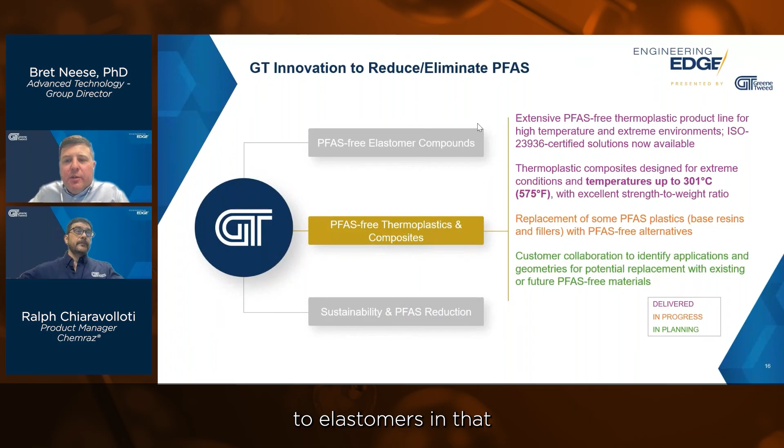Moving on now to PFAS-free thermoplastics and composites. It's a very similar story to elastomers in that we already have an extensive PFAS-free thermoplastic product line. The example that I want to share related to PFAS-free plastics and composites is an example related to wear compounds.

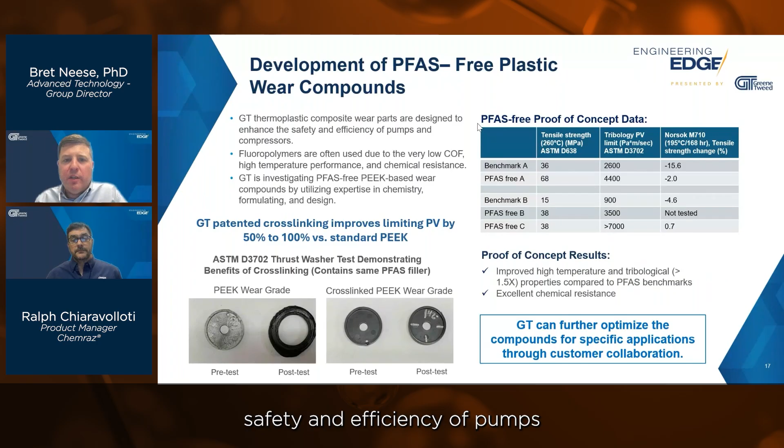I mentioned this at the beginning of the webinar that Greene Tweed has an extensive line of thermoplastic composite wear parts. These parts are designed to enhance safety and efficiency of pumps and compressors, where we've got a lot of friction, a highly abrasive environment, perhaps high temperatures and aggressive chemistries. It's no surprise that in a lot of these applications, fluoropolymers are used. Fluoropolymers have very low coefficient of friction, very good high temperature performance, very good chemical resistance.

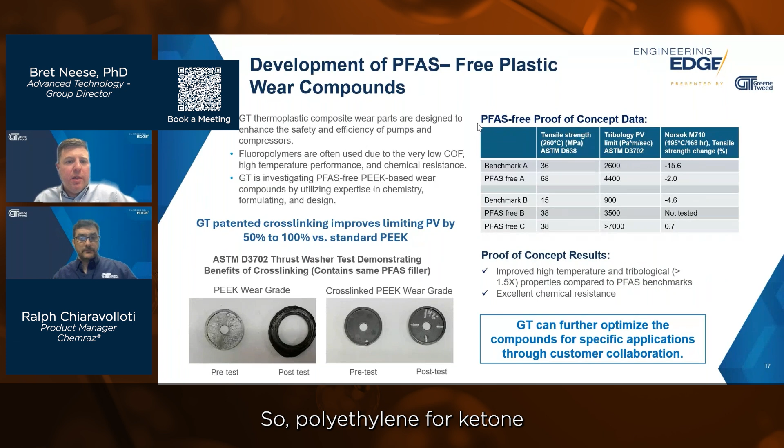The approach that we are taking, looking at PFAS-free, is by using PEEK-based materials, so polyether ether ketone, by utilizing our expertise in the polymer chemistry and cross-linking chemistry, and again, in our ability to formulate and then ultimately design a part that makes use of whatever material properties we can enhance here. And we think that we have a technology that is a key enabler for us to get into PFAS-free wear compounds, and that is our patented cross-linking technology for cross-linking PEEK.

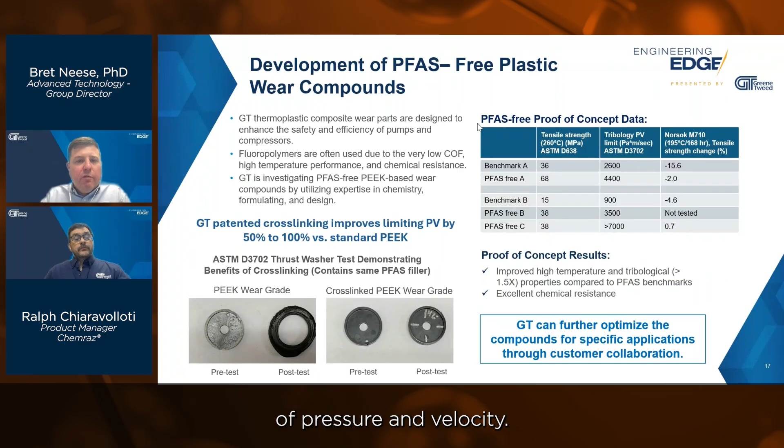And what we see is our ability to cross-link PEEK enables us to improve the limiting PV. So PV is a measure of tribological performance. It's a combination of pressure and velocity. So how hard can you push on it and how fast can you spin it? But we can increase this limiting PV by 50 to 100% at least versus standard PEEK with our cross-linking.

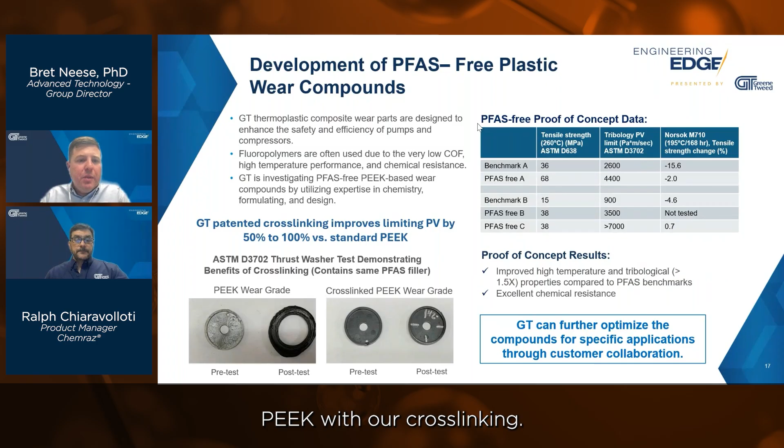And so what you can see is that there's a demonstration of this in the bottom left. You see a couple of images. These are images coming from an ASTM D3702 thrust washer test. And now caveat here is the materials that I'm showing here do contain a PFAS filler.

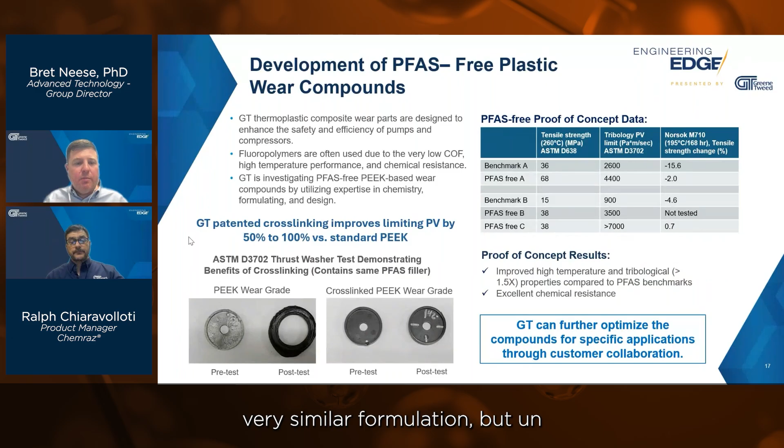But basically the compound on the left is a PEEK wear grade that is not cross-linked. And the images on the right are of a cross-linked PEEK wear grade, very similar formulation, but uncross-linked versus cross-linked. And you can see in the uncross-linked material, pre-test versus post-test, you can see the deformation and degradation of the material, but the cross-linked one is basically untouched.

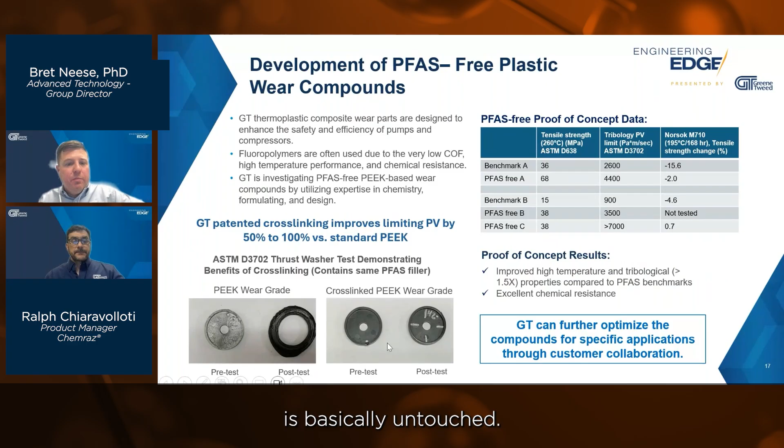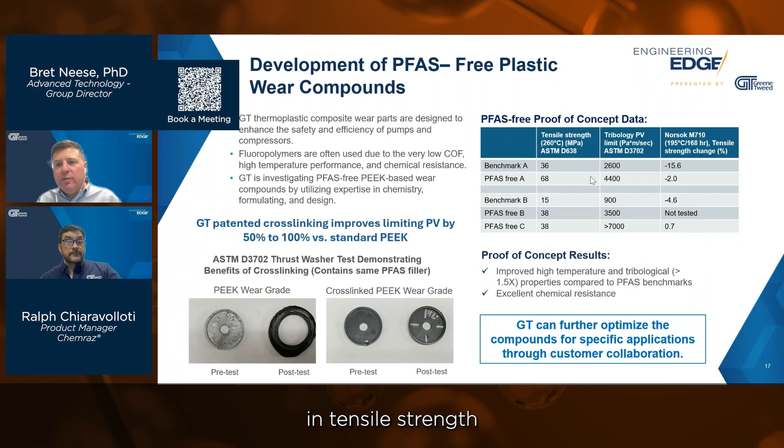And what you can see is we can actually improve upon the tensile strength. If you look at PFAS-free A versus benchmark A, we can improve upon the tribological performance. And we measured chemical resistance. Here I'm just showing the change in tensile strength when exposed to a NORSOK M710 fluid at 195 C, 168 hours. We have other chemical resistance data, but this is just to demonstrate better chemical resistance.

Similar story with PFAS-free B and PFAS-free C, where you can see we improved the tensile strength, better tribology, and in the sample that we tested in chemical resistance, it's pretty good. It's better than the control.

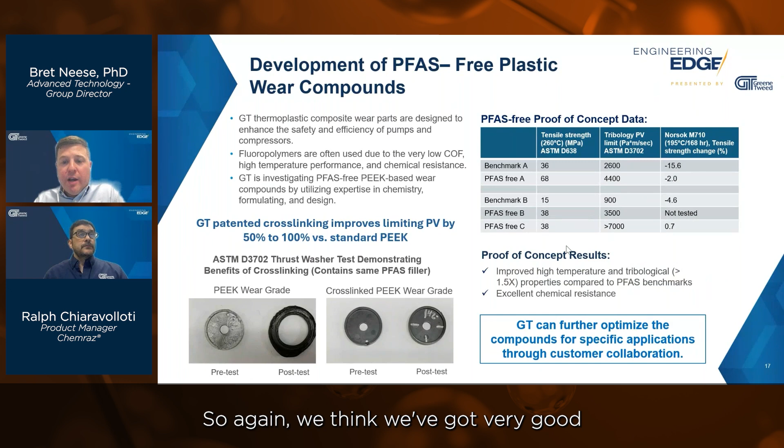So again, we think we've got very good high temperature properties here, good tribological properties compared to PFAS benchmarks and chemical resistance. This is another one we would love to identify some specific applications with customers where we could take this as a starting point and optimize these compounds and bring them to market.